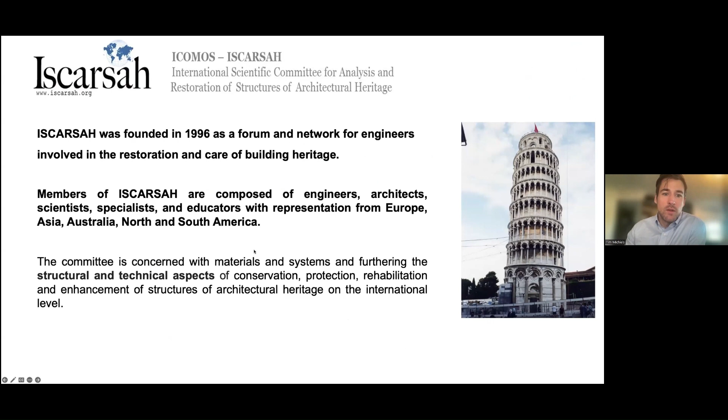Today's webinar is brought to you by ISCARSAH, the International Scientific Committee on the Analysis and Restoration of Structures of Architectural Heritage. While more people join, I will briefly introduce our scientific committee. We are an international group of engineers, architects, scientists, and educators dedicated to the restoration and care of built heritage. We mostly focus on the structural and technical aspects of conservation of architectural heritage.

We have a diverse board with, at the helm, our president, Paulo Lourenço, and our secretary general, Tom Morrison. The goals of ISCARSAH are, amongst others, to disseminate knowledge, promote international cooperation, and organize international training programs. Another goal is to collaborate with other scientific committees, and we are happy to welcome speakers and members from a wide variety of ICOMOS committees today.

In the past, ISCARSAH has published principles for the analysis, conservation, and structural restoration of architectural heritage, and we are currently finalizing the monumental task of creating updated guidelines for the analysis and restoration of heritage structures. We publish newsletters and a bulletin and organize two webinars each year, all of which can be found on our website and YouTube channel. We also organize workshops.

The last ones were in Iran, Korea, and Japan. The next workshop and general meeting will be held in Romania in September. Thank you, Radu Kazimir, and all of ISCARSAH Romania for organizing. You can still sign up and join us in Romania in September.

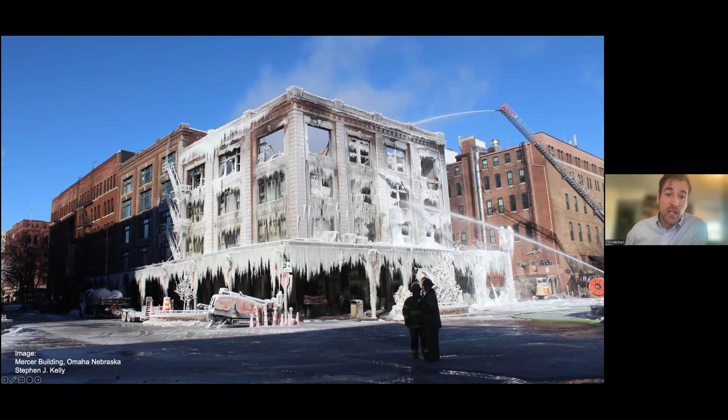The recent traumatic burnings of the Brazilian National Museum, Shuri Castle in Japan, or today's blaze in Copenhagen illustrate that. As heritage professionals, dealing with fire is not a new task. Adaptation to fire has shaped our building practices for centuries, as structures have been burning and rising from ashes for ages. As caretakers of historic buildings, we are not only tasked with the aftermath and restoration or reconstruction, but also have a duty to protect and plan ahead for the next fire.

At ISCARSAH, we believe that knowledge transfer and education is one of the key elements to help mitigate fire risk. Therefore, we have assembled four experts today that have dedicated their careers in part or in whole to assessing and mitigating fire risk. We bring to you perspectives from New York, Iran, Switzerland, and London on fire risk in Mongolia, Isfahan, Bhutan, and France. On behalf of myself and my co-organizers and the entire ISCARSAH community, I would like to thank these speakers for their dedication and for sharing their experience.

Our first speaker today is José Torero Cortés. He is professor of civil engineering and head of the Department of Civil, Environmental, and Geomatic Engineering at University College London. He works in the field of fire safety, where he specializes in complex processes and environments. Prof. Torero Cortés has participated in numerous fundamental research studies that range from how fire affects historic buildings to modern architectures and even spacecrafts. He has developed novel technologies that use smoldering combustion for the purpose of resource recovery that are being used globally, and he has received multiple awards. He's a chartered engineer in the UK, a fellow of the Royal Academy of Engineering, the Royal Society of Edinburgh, the Australian Academy of Technology and Engineering, the Society of Fire Protection Engineers in the US, the Institution of Fire Engineers in the UK, the Institution of Civil Engineers in the UK, and of the Combustion Institute. Prof. Torero Cortés will speak about the fire at Notre Dame Cathedral.

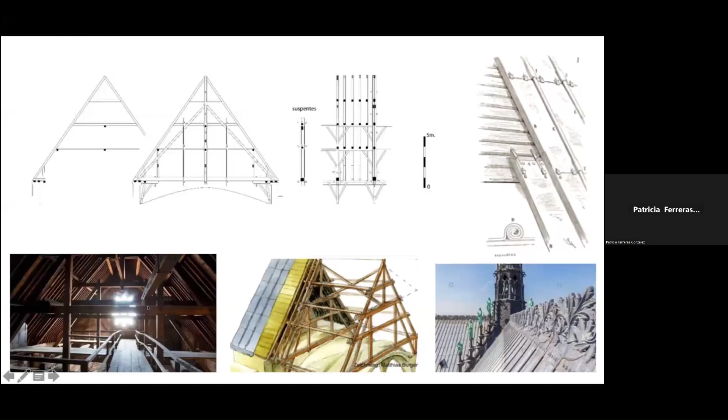On the bottom left is a photograph of what is nicknamed 'the forest' - basically the structure of the roof.

This type of timber structure has the potential of burning quite easily. It's very dry timber with very small elements, all aligned very close to each other, so there's a very significant amount of radiative heat transfer. So the hazard is a very significant and recognized hazard - something we know actually exists, and that we should be protecting for.

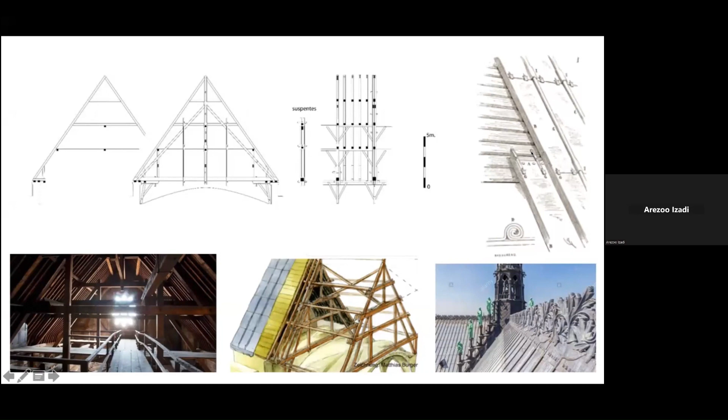For that purpose, you can see in the two right images the lead shingles or lead cover used as protection that had been taken out for repair. This is, I guess, the key question. We have a very well-known and extraordinary hazard, and a mechanism of protection for it, and that mechanism of protection has been taken out - rightfully, for the purpose of developing repair works.

So now the question really is, what kind of precautions should be taken? What is the kind of training and competence of the contractors working on this, and how do we guarantee that an event of this nature should never happen? Because in principle, that is the key question to be addressed - this event should have never happened. So why did it happen in the first place?

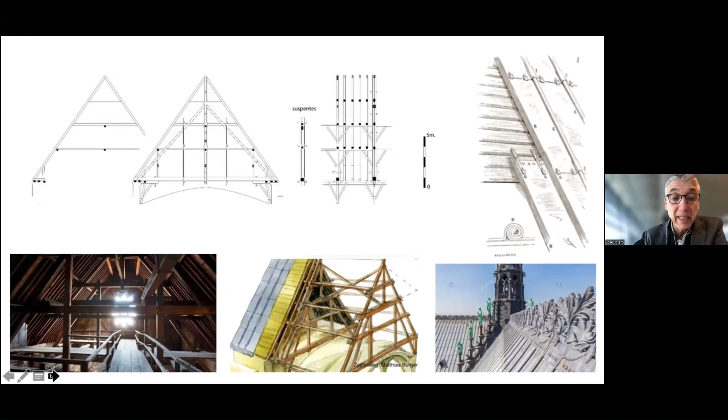This is a bit of a problem because, in essence, before you call the fire service, you need to bring somebody up to verify there is a fire. Only then do you call the fire brigade and start the process of addressing the event.

The fire was detected at 6:18, but it was not confirmed until about half an hour later. So the first engine does not arrive until 7:25, to start with the appropriate external attack. The firefighters arrived about 30 minutes into the event. In the timescale of a fire, a 30-minute delay is an extraordinary delay - an absolute lifetime. So a protocol that resulted in a delay of more than 30 minutes, almost bringing the appropriate appliances an hour later into the fire, is something completely unacceptable.

Furthermore, there are issues with the incapability of the systems to provide water to the roof. The water was reaching only the walls of the building. Furthermore, there was a standpipe that was not functional, for which the fire service had to improvise and extinguish the fire in the North Belfry, carrying spools of hoses up a terrace and draping them over the facade to receive water supply. So in essence, this is not one intervention in which things are working the way they are supposed to work.

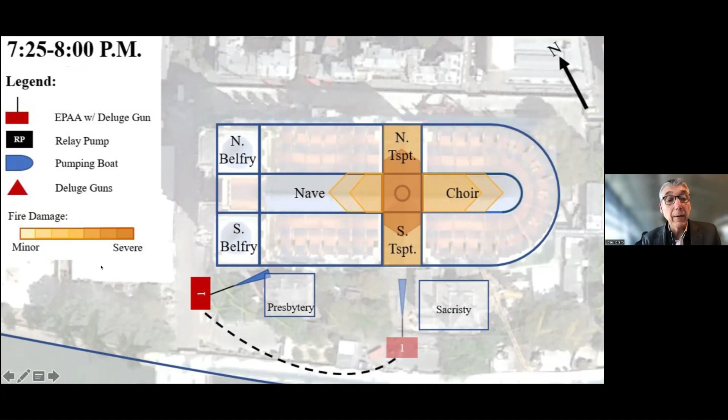Eventually the steeple will collapse, perforating the vaults and landing an enormous amount of burning debris into the interior of the church. At this point in time, about half an hour later, the fire has already spread all over the roof.

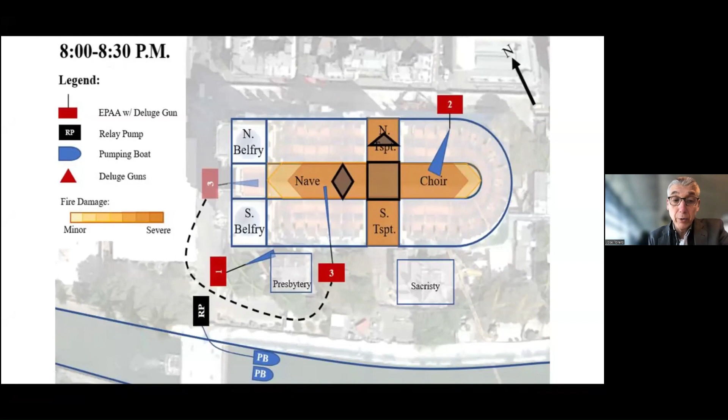It's only at this point where the firefighters can actually reach elements of the fire with water, using pump number 2. Pump number 3 is being moved away towards the north belfry to try to fight the fire there, and that pump, which was trying to stop the fire in the roof, considered the fire was already gone and started taking control of the north belfry, which technically speaking was a very good decision by the firefighters to try to stop that fire.

But nevertheless, at that point in time, there is basically no roof left. The steeple had collapsed at about 7:50, and the roof was already gone at that point.

One aspect that was advertised very strongly by the media was the use of Colossus, an automated robot that went into the church and tried to fight the fire. You can see from the image that the jet is being pointed towards a fire that is above, and the water is really not getting to the fire. It was somehow effective in fighting the fire at the ground of the cathedral, but that was a secondary fire because given the volume of the cathedral, that amount of fuel would not have been that significant.

So in essence, while this was very heavily promoted as being an extraordinary success, the limited success of the use of this robot is something we actually have to consider when we think of firefighting tactics for a building of this nature.

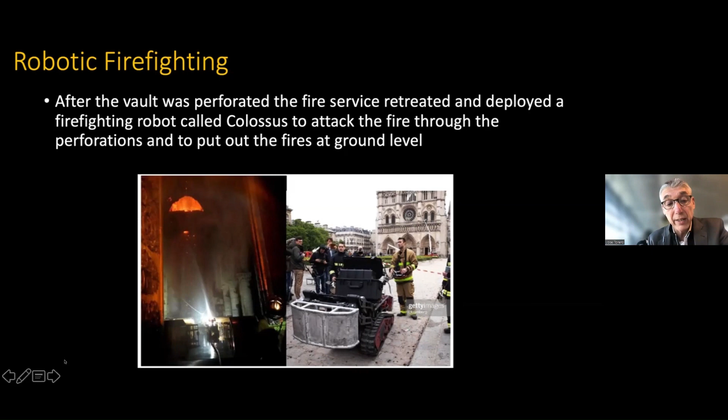So as you can see, this is not a prime example of extraordinary performance in response and preparedness. I think we need to really think very carefully and ask ourselves whether in an event of this nature, it is acceptable to be so unprepared in dealing with absolutely invaluable patrimony. Notre Dame is one of the symbols of France and of humanity. Its value is immeasurable, and the risks and hazards were very well known. It is difficult to understand how a sequence of events of this nature can happen, from the onset of the fire all the way to the response and intervention, that allowed a situation to build up to a point where we lost complete control, and the fire basically destroyed a very significant part of the patrimony. Thank you very much, that's pretty much all I have to say. I'll mute myself and pass back to the moderator.

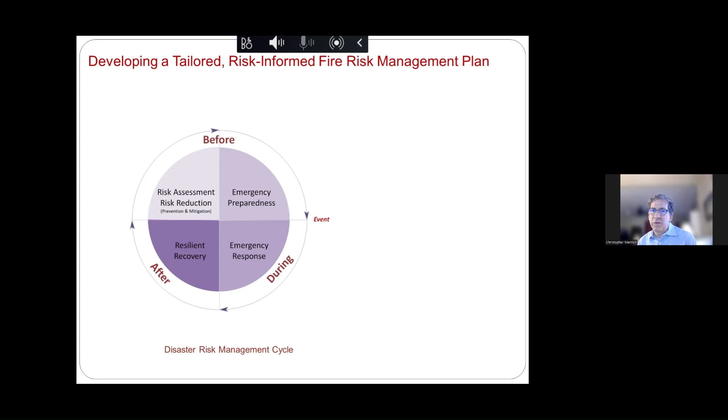In terms of developing a risk-informed management plan to help reduce the potential for fires, just looking at the overall disaster risk management cycle, which some of you have probably seen, we try to address prevention—limiting fire from happening—and then obviously planning should something happen, the emergency response part, and then having plans in place for resilient recovery. What I wanted to focus on more this morning was just the before portion, in terms of developing a risk assessment and risk reduction measures, and also getting into some emergency preparedness.

In terms of the process, first starting out is understanding our goals and objectives and what it is that we're trying to do, and should there be a fire, what are the limitations, hopefully in terms of amount of damage.

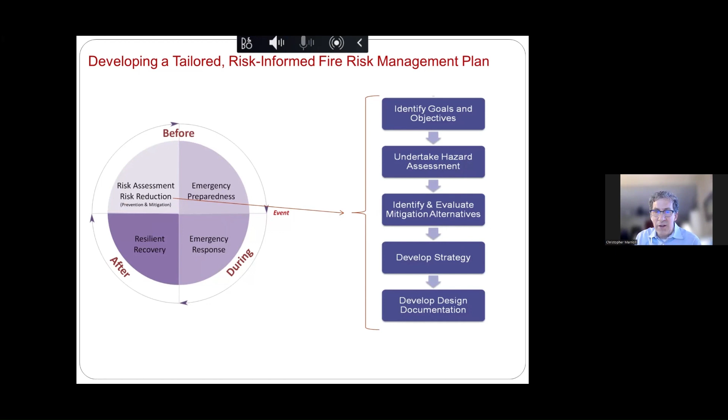Once we understand what we're trying to do, the next is doing a hazard and risk assessment to understand from a fire side what some of those may be and where our vulnerabilities may be. From there, we then look at what can we do and put in place in terms of prevention and mitigation measures, and then developing and implementing an overall strategy in order to accomplish our objectives.

Looking at objectives, a few different things being cognizant of was obviously the safety of occupants and the emergency response team. We're also looking at protecting the historic structure, as well as the collections and content. We want to maintain the intended functionality, and in part what that means is the burning of candles and butter lamps. So we're not looking to say you can't do that, but it's acknowledging that's part of the functionality of the monastery. How do we do that safely?

And then developing an overall risk-informed fire risk management plan that accomplishes a few things, including incorporating the inherent features where we can, embracing local indigenous traditions, knowledge, materials, and resources, minimizing the impact when we do that in terms of limiting impacts on historic fabric, and that the solutions are integrated and work together.

The other thing is obviously being aware of resources, particularly financial resources, and having measures that are cost effective and low cost, high impact. Also that these aren't just day one working, but thinking going forward about some of the different issues, making sure that these are really sustainable in terms of a long-term effective perspective.

In terms of ignition sources, just a quick overview, some of the main ignition sources are the burning of candles and these butter lamps, which are kind of chalice-shaped cups, where they put actual butter in and then burn cotton wicks. They leave these in the monasteries until they end up burning out.

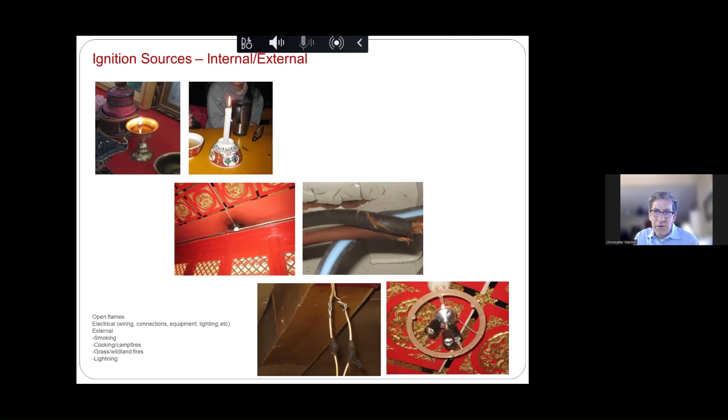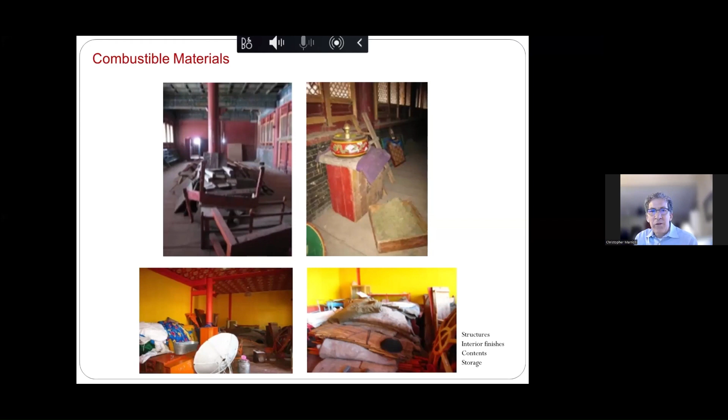A fair amount of combustible materials has accumulated over the years that were noted, as you can see here. Some of this debris could probably be removed, and others they may want to obviously keep.

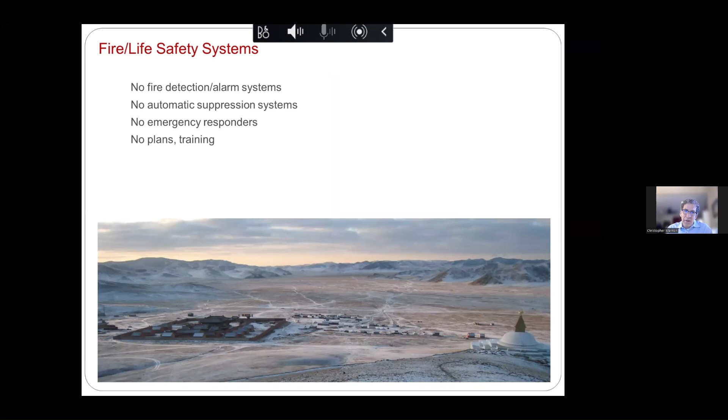In terms of overall mitigation systems, there was nothing at the time in terms of fire detection and alarm systems, or automatic suppression systems. You can see here how remote this is, with no emergency responders and no emergency response teams on site. Nothing at the time had really been done in terms of any planning, training, or running of drills.

So kind of encapsulating that, what does that mean? In summary, we have a lot of potential ignition sources, which means there's a higher probability of there being ignition. We have a lot of combustible materials, which can lead to fast growth, large and long duration fires. Without having any automatic detection or alarm system, there are delays in responding and notifying people to be able to try to put the fire out while it's small and manageable. There's no automatic suppression system, so the fire will continue to grow if it's not fought in manual suppression.

With the limited awareness and training, it will be very difficult in terms of response and trying to do any kind of manual firefighting. And these 28 temples within the overall monastery are fairly close, so there's a chance for fire to spread.

So what do we do? Looking at two things. One is, can we reduce the probability of ignition even happening? And the second part is, what can we do to try to limit the overall magnitude, size, and growth of the fire?

In terms of reducing ignition sources, again, we don't want to be saying you can't have butter lamps and candles and so forth, but what can we do to make this a little less susceptible to fire? One part is just looking at some of these butter lamps, and can we help stabilize these so that they're not able to tip over as readily?

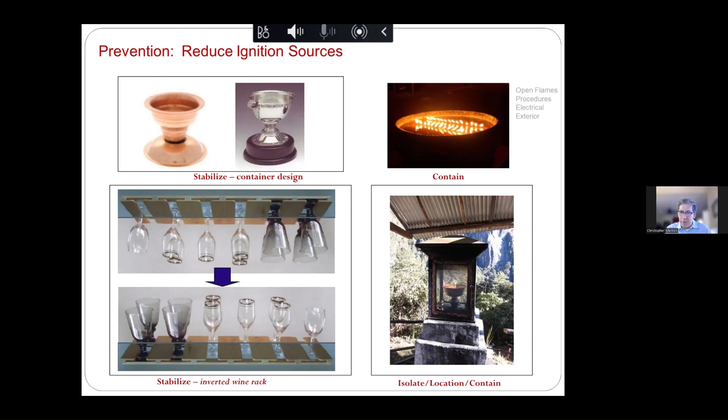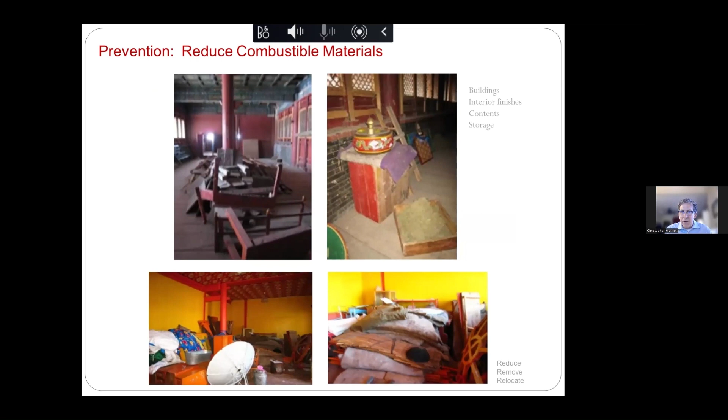In terms of combustible materials, again, prevention - if we can at least separate ignition sources from combustible material, but also reduce the quantities, whether we can get rid of that, whether we can move some of these out of the main temple, which is really the most susceptible and the one they're trying to protect the most, but even relocate these in some of the smaller temples adjacent to this if they need to keep them. Whatever can be done to try to reduce combustible materials will definitely help.

In terms of mitigation strategy, broadly, globally, we're looking at detecting a fire. Once it has started, we need to notify occupants and emergency responders. They then need to respond, and then suppression activities can begin.

As you can imagine, though, we're not able to really do that in this particular location due to a number of things, from where it's located, and especially resources and financial resources in terms of trying to parallel what may be done elsewhere in the world. We're looking at having more of a manual detection, notification, response by people there on site.

So what this may look like a little bit closer was looking at having the butter lamps in the main temple area, which is where people really wanted to be, and not have those in the surrounding other 27 temples. And then having some of the younger monks - there's probably about 40 of them, at the ages of probably 5 to 15, that are there studying and practicing - maybe do an hour or two of fire watch throughout the main temple area.

In terms of notification, we looked at using the bell - the main monastery bell had fallen - so looking at using the conch shell instead, since they were using these to wake people up in the morning and call them into prayer. So they were very cognizant and tuned into that.

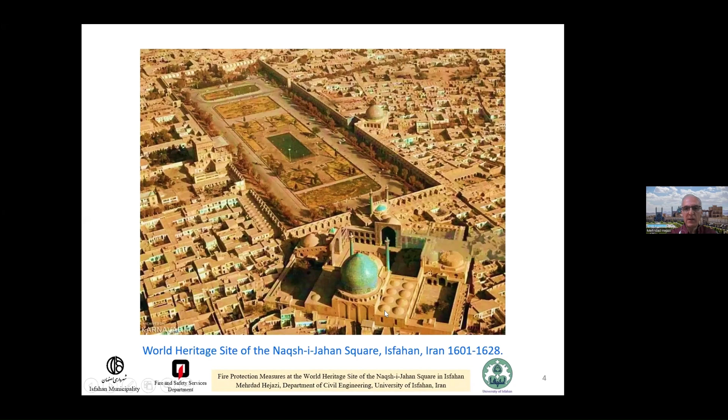The site is quite huge, more than 500 by 100, and there are 4 bazaars around and three main buildings of Isfahan. It is a World Heritage Site, built about 4 centuries ago. These are the main 6 parts of the site.

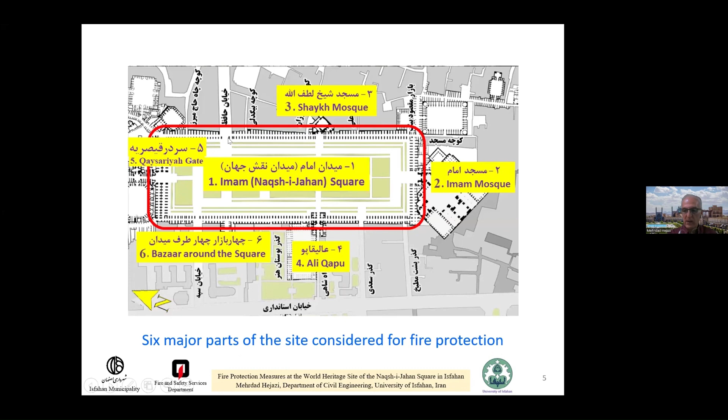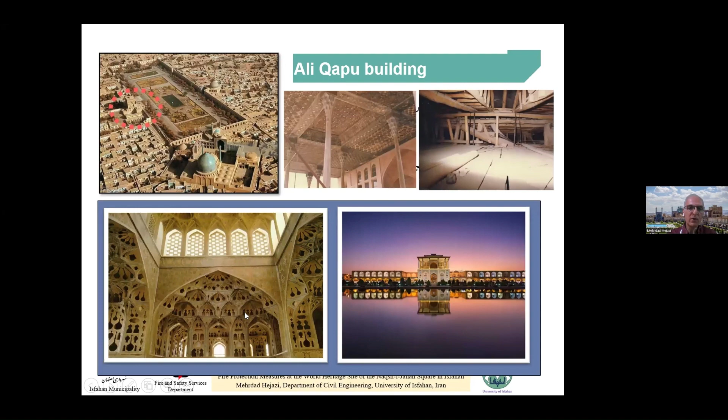As you see here, this is the main mosque, and inside here you see the second mosque. Here you see a palace, and the palace has a wooden part similar to what Chris showed us, and also inside there are some precious paintings and so on. It is also the entrance of the main bazaar, which is itself a precious piece of art. Around, as you see here, there are some shops, and here you have ignition sources that we had to tackle.

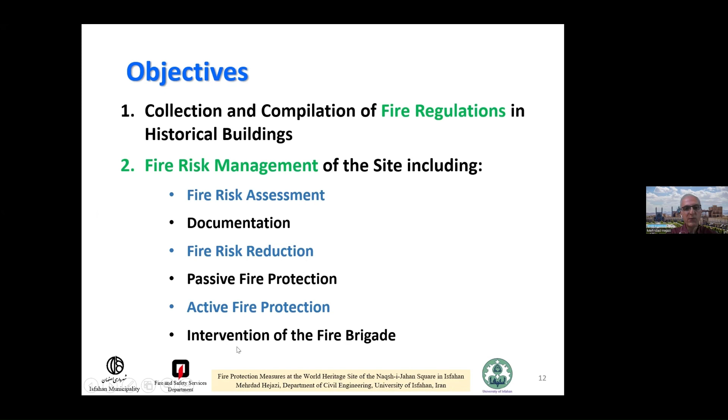The objective was first to collect and compile fire regulations for historical buildings, which are mostly made of masonry and in some parts wood. Then we planned the fire risk management of the site, which included fire risk assessment, documentation, fire risk reduction, a plan for passive fire protection, a plan for active fire protection, and a plan for intervention of the fire brigade.

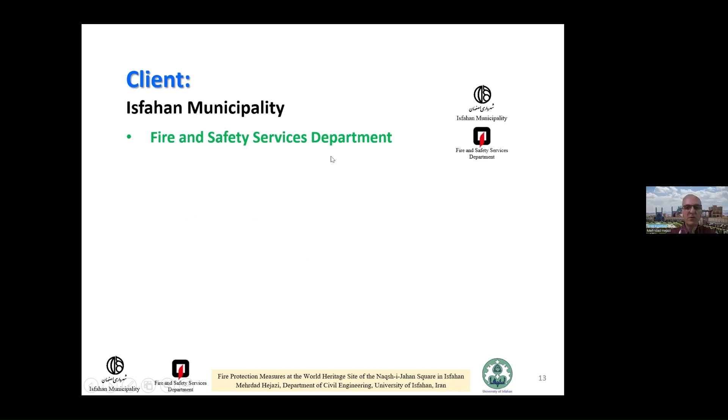UNESCO had asked the Iranian Ministry of Cultural Heritage to make a disaster risk management plan for the site, and one part was fire. Isfahan Municipality and the Isfahan Fire Safety Services Department were in charge of that, and we at the University of Isfahan did the project. The main user is the Cultural Heritage Organization, and also the people who live or work there. The project was carried out over more than a year, from 2020 to 2021.

The first part of the project was to collect and compile some fire regulations. As you know, there are so many regulations all around the world. Even in Iran we have a regulation for that, but we had to choose regulations that comply with the situation we had, and we were able to do that.

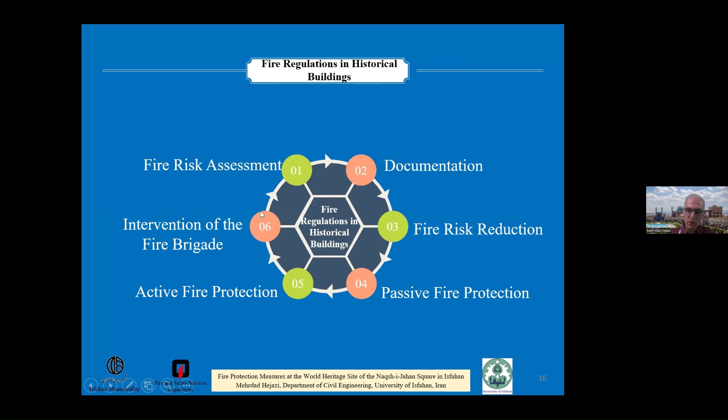We made a good search on fire risk assessment methods, documentation, fire risk reduction, and so on, which were suitable to the site. Then we went to the fire risk management of the site, and the first part was understanding and identifying the site based on fire risk.

In order to do that, we had to design checklists which were usable or suitable for the site. Then we had to do space coding because it was a very large site. Then we had to see the current status of fire alarm and extinguishing systems in the site.

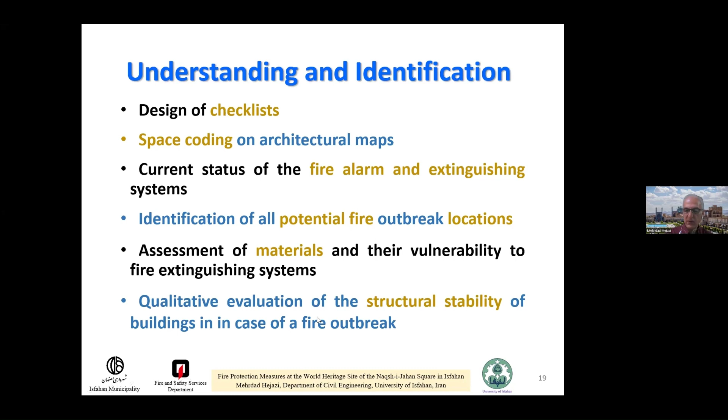We identified all potential fire outbreak locations and ignition sources, and also assessed the materials and their vulnerability, relevant to the fire extinguishing systems that we were going to use later. At the same time, we did a qualitative evaluation of structural stability, in case something happens, so we were sure what would happen.

This is a sample of the checklist. It is in Farsi language, but if I explain: this checklist is just for one space, I would say for one shop, for example.

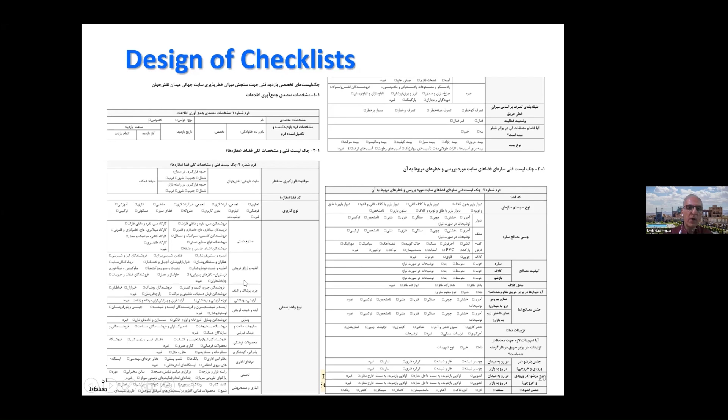This explains the material type, the type of structure, the openings, the material of the windows, and the type of shop and what is sold there. We also had to do space coding for the whole area, checking and getting information from every specific part.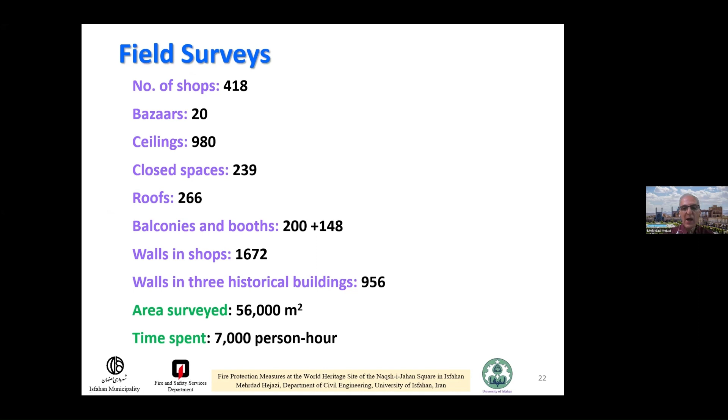The number of shops surveyed was over 400. The bazaars around were 20 parts. The ceilings numbered around 1,000, closed spaces more than 200, roofs more than 200, balconies on the second floor over 300, and walls in shops were 1,600, with walls in the three historical buildings around 1,000. The area surveyed was more than 55,000 square meters, and we spent over 7,000 person-hours there.

First, we went to fire risk assessment. To do that, we had to choose a usable method. We chose the ABC method suggested by ICCROM for museums, but we developed it further to be applicable to the site and the buildings. At the end, we were able to sort the magnitude of risk.

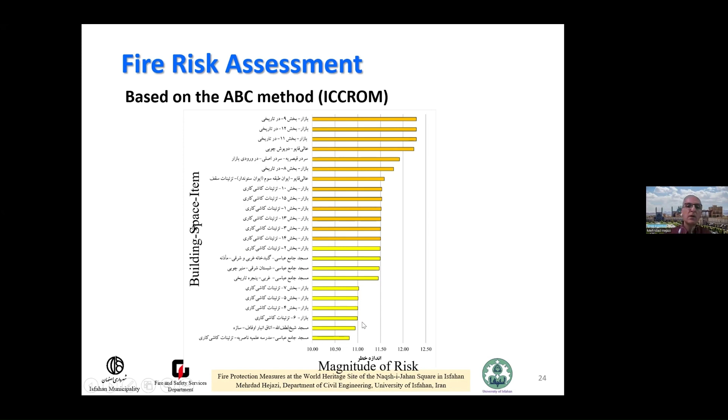Here you can see the building, the space, and the item. There may have been more than 2,000 or 3,000 of these items, and we were able to evaluate the magnitude of risk and give priority to them to tackle.

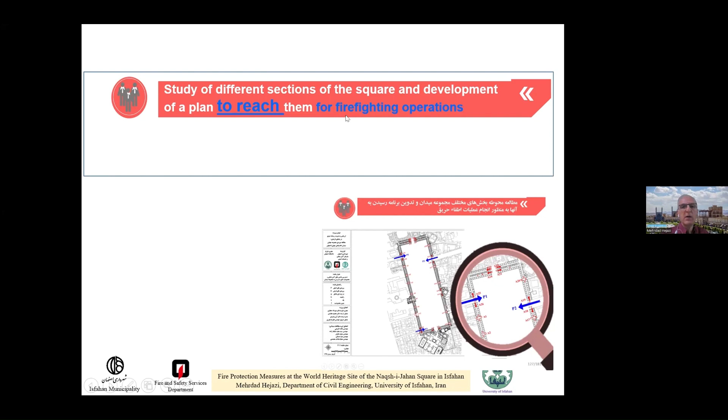Then we had to develop the intervention plan. I'll explain some parts we did. First, we had to study and suggest a plan to reach the different parts of the site by fire fighters.

We suggested water reserve sources in different parts, because in case something happens, we need water. So we suggested in which parts they should be located.

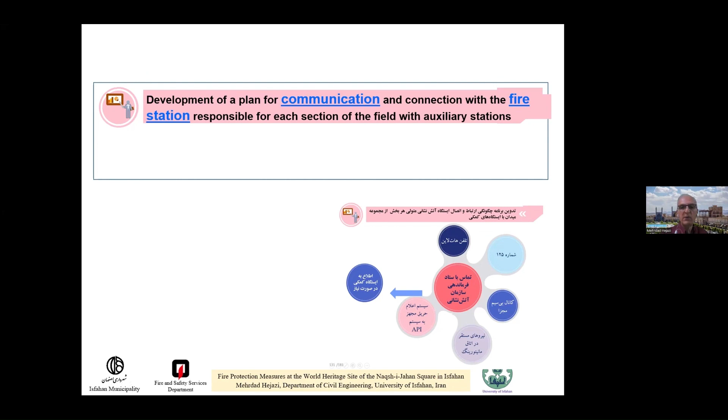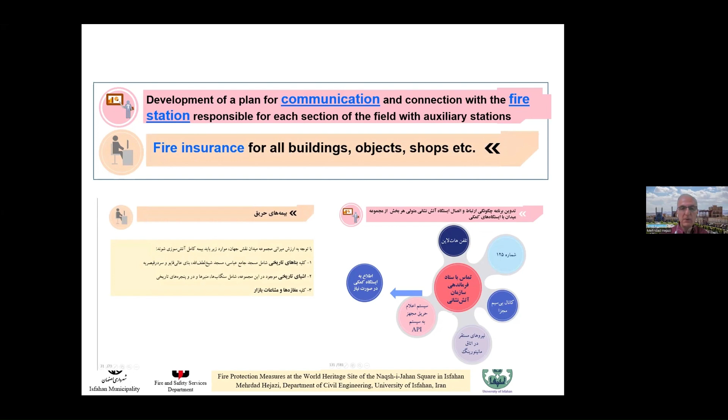The communication system with the fire station around was not so good, so we did some design for that. Also, most of the shops or even the buildings were not insured, so we planned for them to get fire insurance in case of any incident.

Then we went to compartmentation of different parts in order to prevent fire from progressing, so if something happens we can contain it.

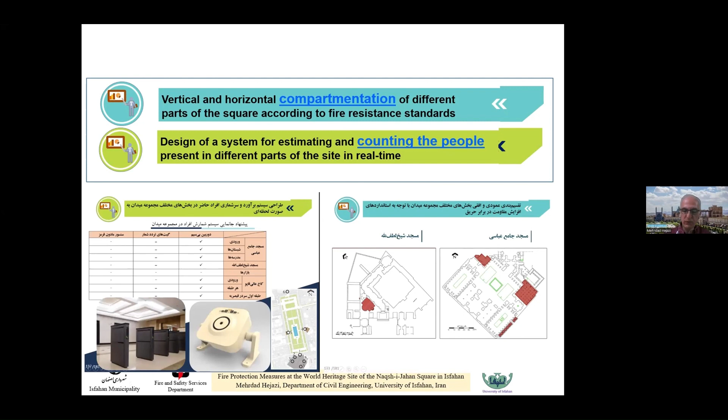It has two sides: one is the historical buildings. Inside, we had to have a counting system to know in real time how many people are there, in order to be able to evacuate both the buildings and the bazaar.

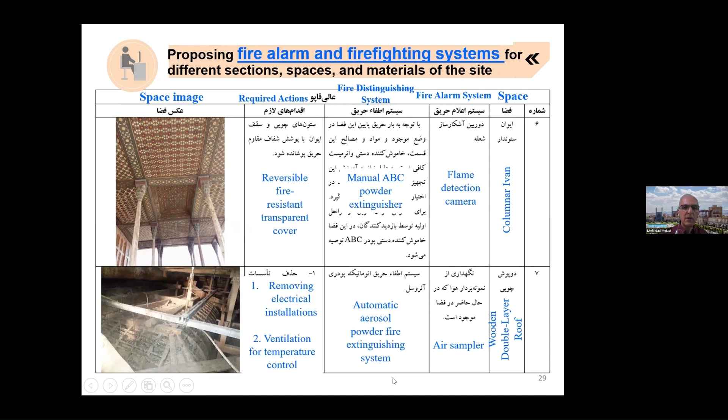For each specific space, we suggested a fire alarm system — for example, flame detection cameras, fire extinguishing systems, and other actions that should be taken. For every single one, we worked with the help of experts.

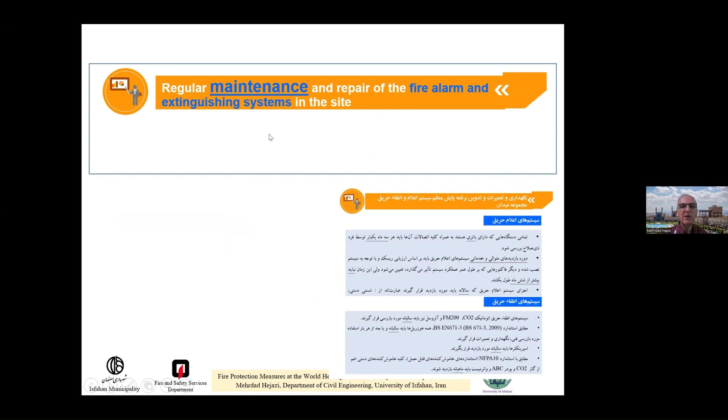For the maintenance of the system to be installed later, we did some planning, and also for an alternative communication system in case of power and telephone outage, we made plans.

Because there are items like wooden doors and drawings, we made catalogs for each and set priorities, so if something happens, the fire brigade would know where the item is located and what to do.

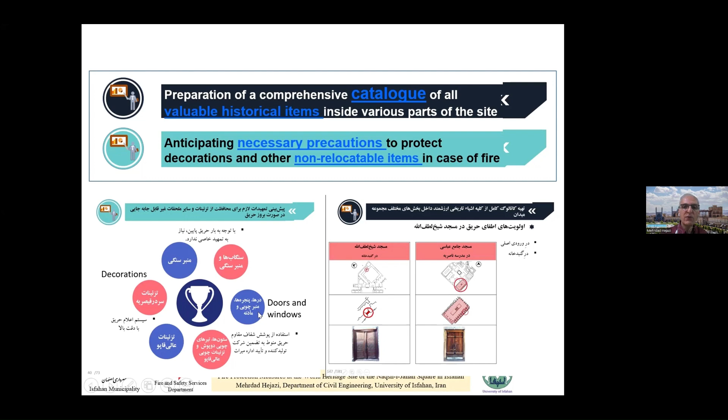To mitigate and prevent risk, we suggested precautions to protect items during a fire, and for action during an incident, we planned for quickly alerting the fire station.

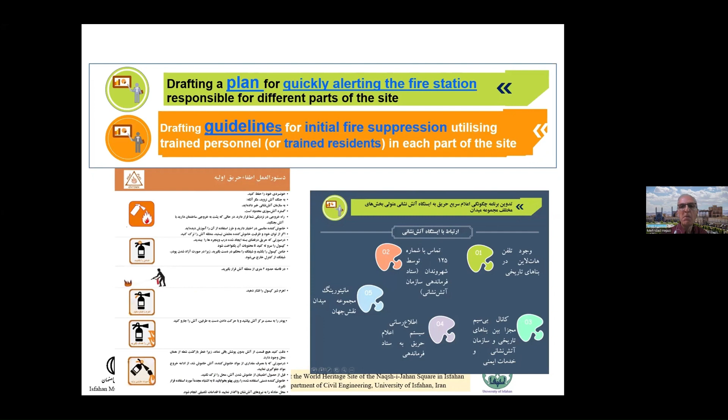We prepared guidelines to be installed in every part, including guidelines for the evacuation of visitors, to be installed throughout the site.

We also planned for emergency response in different parts so everybody knew their duty, and for each building we prepared a booklet called the Fire Extinguishing Plan and Guideline.

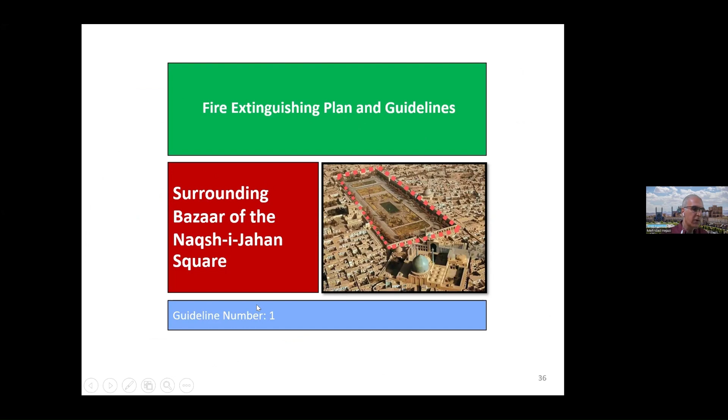For example, for the bazaar, it included the fire extinguishing plan and guidelines, and we prepared a site plan for each part.

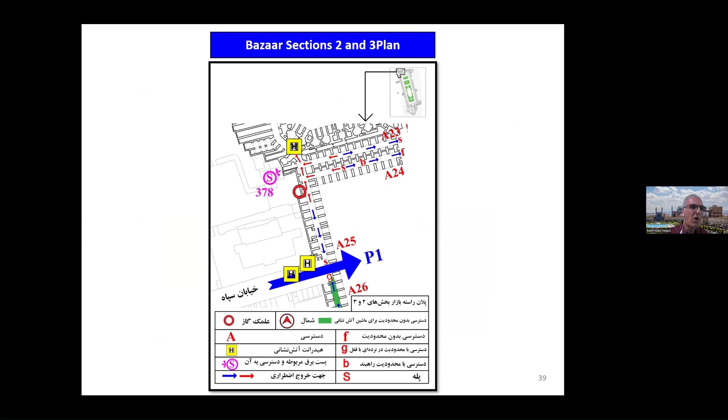We prepared plans for evacuation routes and evacuation procedures for visitors, as well as for the security personnel responsible for fire response.

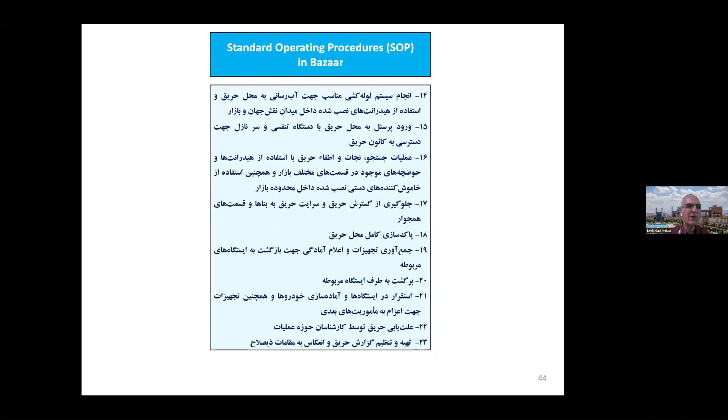Thank you very much, and I hope you have enjoyed this presentation.

Now we can go on with the last speaker, Andreas Galmarini, a structural engineer with a background in bridges and reinforced concrete structures, whose portfolio contains projects all around the world. He is a member of the Swiss Humanitarian Aid Unit focusing on structural assessment after earthquakes, and since 2016 he has been a board member of WaltGalmarini, a structural design office in Zurich working on hybrid and mixed material bearing structures. Today he will speak about the reconstruction of one of the most important heritage buildings in Bhutan, which fell victim to a fire.

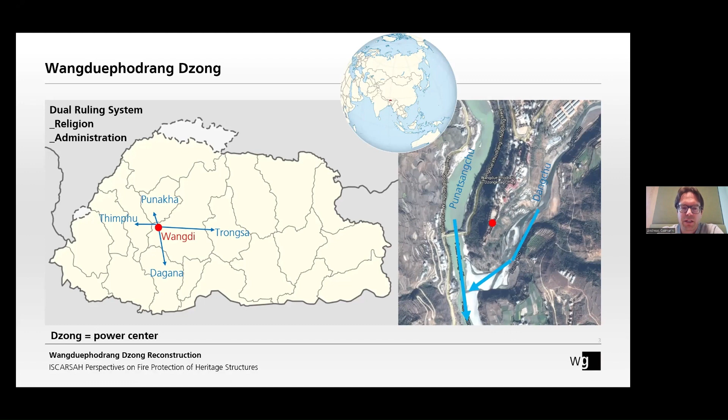In Bhutan, they have the speciality that in every region they have the administration and the religion gathered in power centers, and these are the dzongs.

Our dzong that we are looking at has over time not changed a lot. In the 60s, you see on the right side, the image, it's really on the hill, accessible especially from the back of the image. It was built in the 17th century by the state founder.

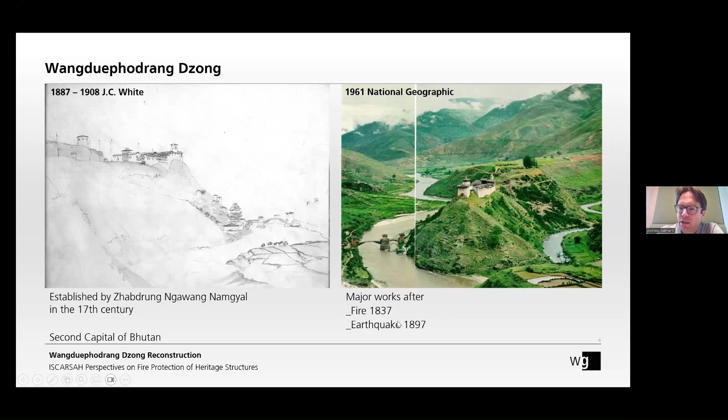It was the second capital of Bhutan. And we know that there were major works after the fire in 1837 and about 60 years later after an earthquake.

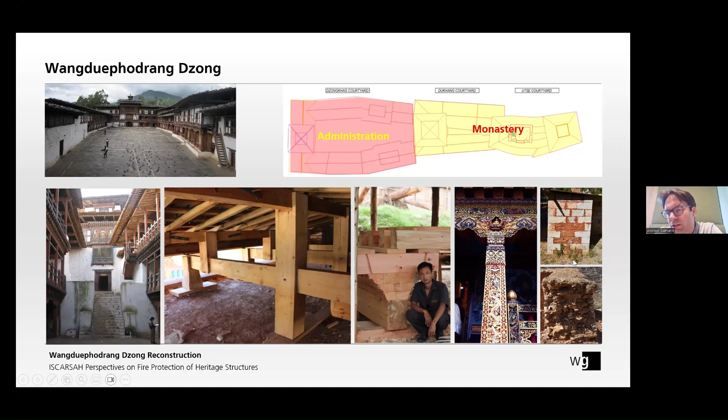If we speak about the structure, then we also have to speak about what materials are used. It is a lot of stone. There is also some rammed earth traditionally. Then there is a lot of timber, used for the roofing and the flooring. There are mostly built up members that are intricately painted and carved. On the right side you see the masonry; between old and younger, you see a lot of variations.

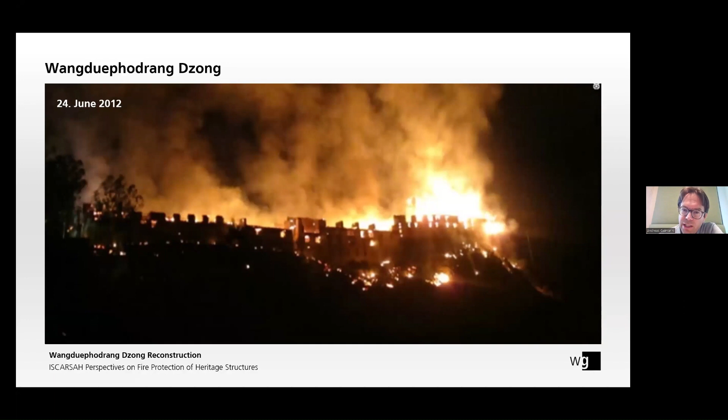Actually, the source of the fire, an electric short circuit, happened in a very bad location, supposedly just beside the entrance. Unfortunately, the first thing that happened is that the entrance tower collapsed and people could not enter, and state television showed the entire night how the national monument, which is also on the tentative list for World Cultural Heritage, burned down.

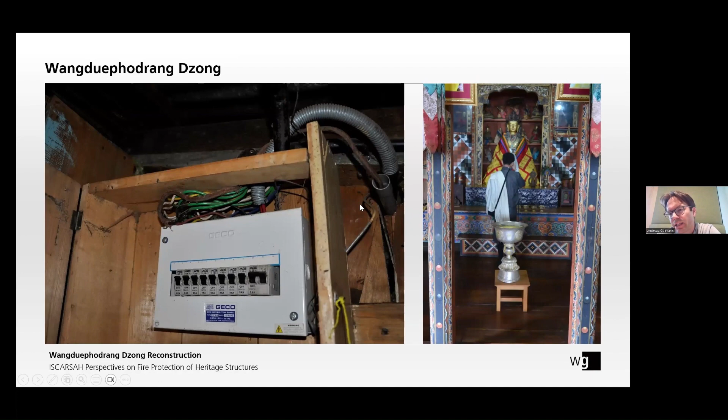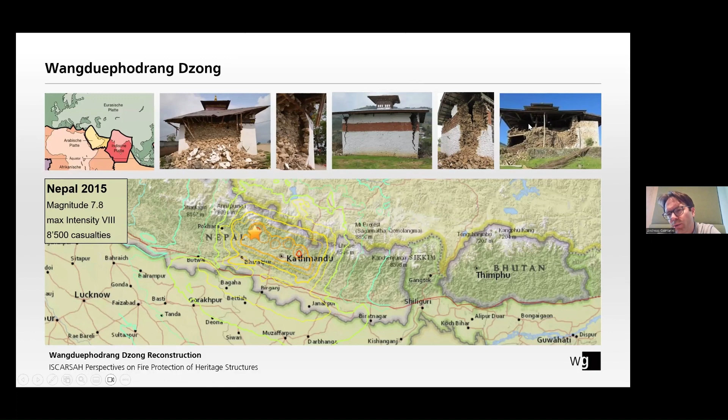The sources are very similar as discussed for Mongolia, the electric installation and the butter lamps. Another source for endangering those structures is the earthquake, and there have been recent earthquakes giving always the same type of damage.

With this structure burned to the ground, the question to the local people, local administration, was what to do. Shall we do something modern with modern standards? Do we rather want something very traditional? If we want it traditional, shall it be very conservative minded, making exactly the same again, or as the clergy would like, a very splendid traditional design?

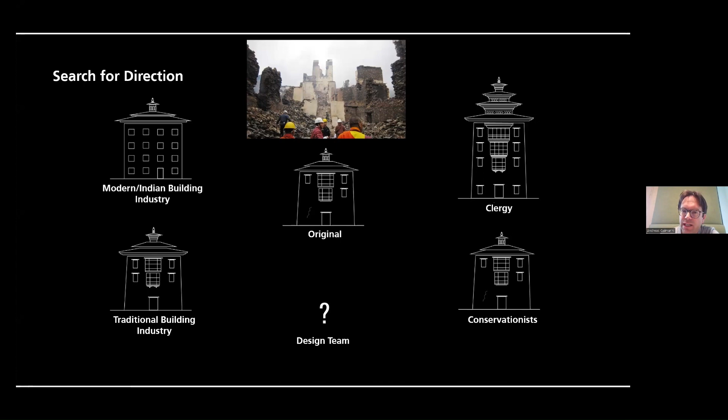To solve such questions, the Bhutanese have a very standard system. They call in international experts and make a workshop, which happened here in this case in 2015, with some participants of this colloquium also participating. We then got the job to help the locals implement what we found out.

The main goal actually was the earthquake proofing. And here we saw these delaminating walls. We mitigated that by inventing a through-stone element, trying to stick together the left and the right side of the wall.

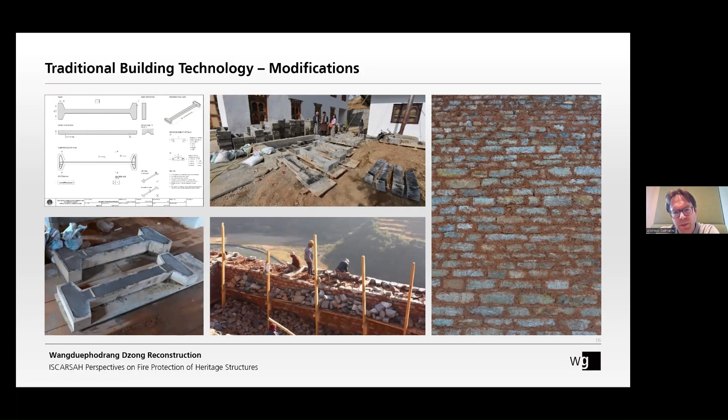As you can see, we did a little prefabrication yard and then an implementation. This is the sample wall to assure that it was not giving a negative impact on the heritage value of those walls that had to be rebuilt completely because the stones were cracked due to the fire.

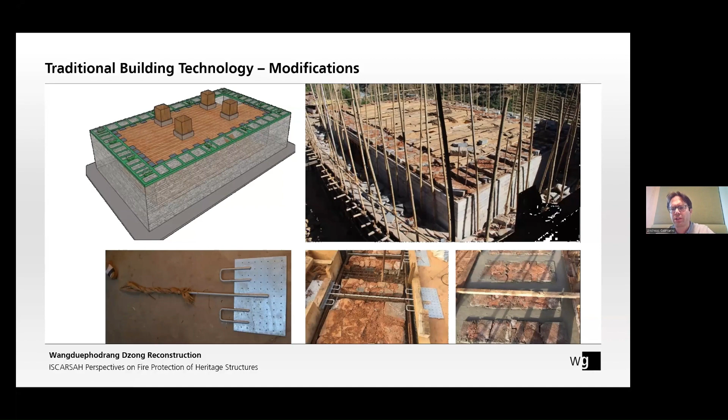We then tied together the entire buildings by a ladder beam connecting to the flooring. You see again the system laid out. It's of course resembling the through stones, just interconnected in a very soft way in order not to disturb the properties of the stone masonry with mud mortar walls.

Then the flooring, we had to make more stiff in plane. So instead of having one layer of timber planks, we introduced 2 layers which were nailed together at 45 degrees. With that, we could earthquake-enhance 90% of the structure, but there was still the highest tower that in the original had a very high basement, which was basically only structure and a stair, and it should host more temples and be higher for the clergy.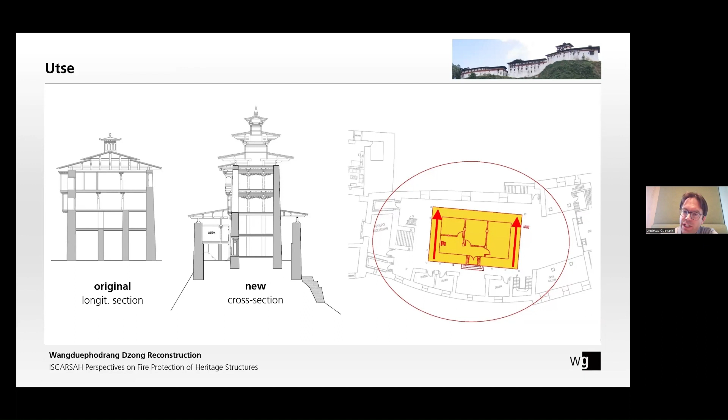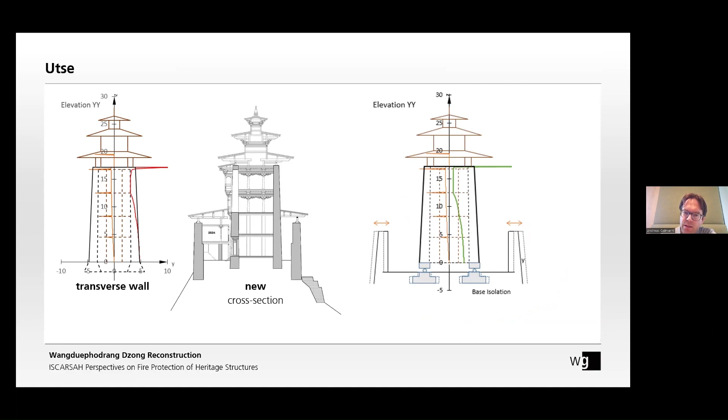It was very narrow on one side. The hill is very steep, so there was no chance we could increase the width of that structure. So what we did is we implemented a base isolation with walls up to 1.8 meters thick. The weight is a real issue, so we had to combine not only elastomeric bearings, but also use sliding bearings to cope with the weight.

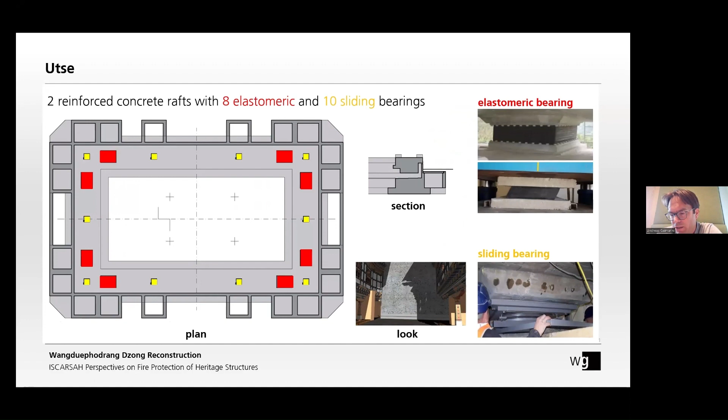A big issue was the look of such a modern intervention in a traditional building. It was decided, though, that it could be implemented, and with that we had the basic design solution to the original. So this was the design. We were working there over half a year to get the basic design ready.

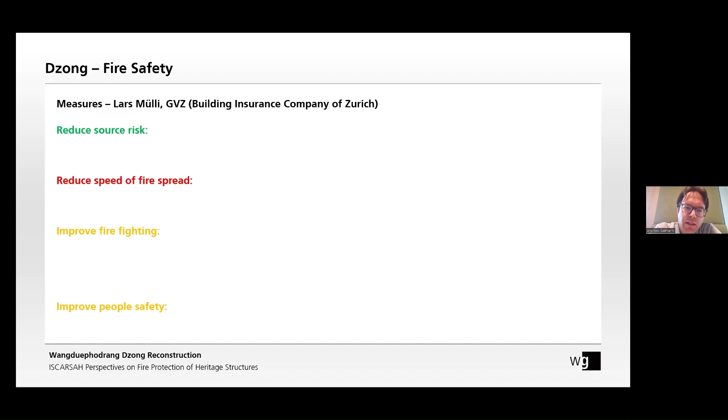Within that time, we also said, well, it's a little bit funny to look only at earthquake proofing. Why shouldn't we also try to implement at least some measures to address fire safety? We got some help from a friend of mine from the building insurance company of Zurich. We tried to address reducing the source risk, reducing the speed of spread, and improving firefighting and people's safety.

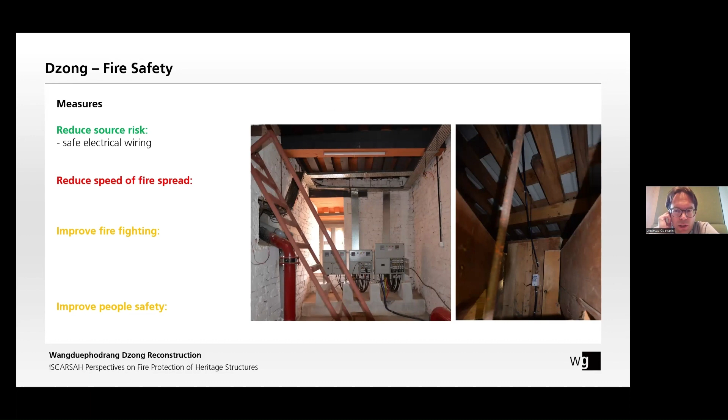What did we do? One is, of course, trying to improve the electrical wiring. You see in the middle a picture that is significantly better than what had been there before. But on the right side, we also see that when you start on a very low level, you can only reach so far, and there will always be some glitches.

Similar to the open butter lamp discussion we had in Mongolia, it is very much the same here. The measures are the same, and the conclusion that you cannot prevent them from occurring is also the same.

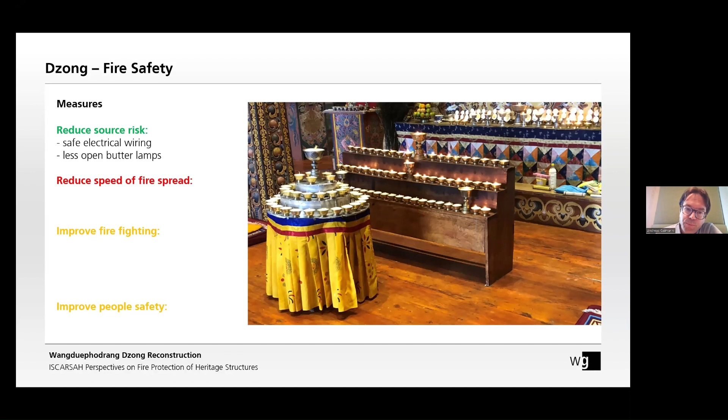Having fire cuts here, we also, in a way, failed. One of the very classical items of Bhutanese architecture is the flying roofs, and they were overlapping, and still are. We tried many different ways, but the locals said they cannot change from having these flying roofs, so we guess they will still be one of the major drivers of the spread of fire.

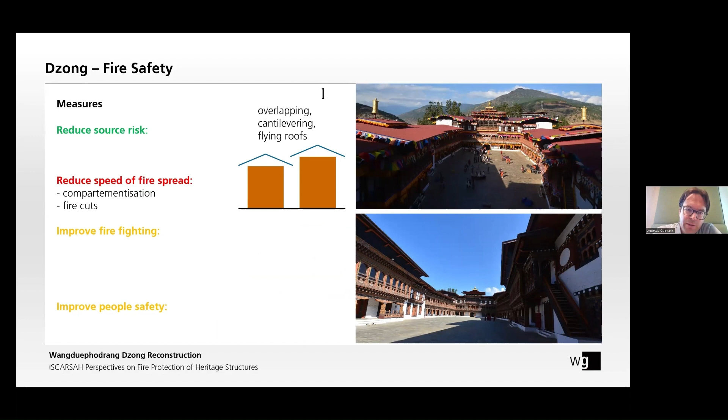There were no hydrants before. We did improve by introducing hydrants both inside and outside in the different courtyards. As you can see, the courtyards can be very narrow, so it is a question not only of having fire hydrants, but also how to get to the area of the fire.

We suggested not training only external people for firefighting, but rather using the monks that live here and are here permanently. They can spare some time and train for firefighting.

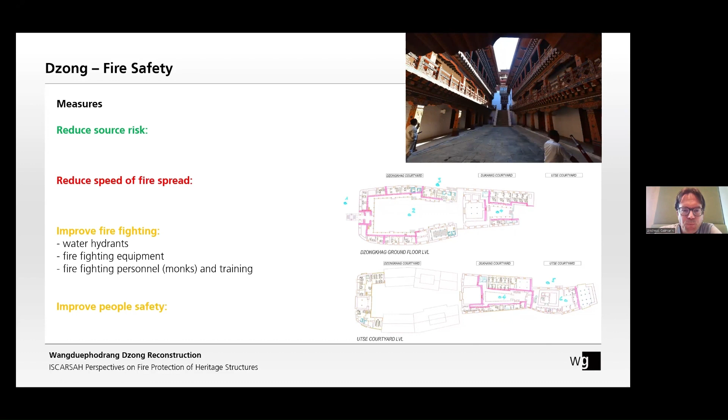Then, of course, reduce the time or the equipment needed. We introduced a tunnel below the whole historic structure, collecting all the piping, which is good not only for firefighting, but also for the structure itself, because having water seepage in the tunnel rather than in the mud walls is an advantage. You see some images of various equipment for firefighting dispersed throughout the structure, and some alarm devices which should help reduce the response time for firefighting.

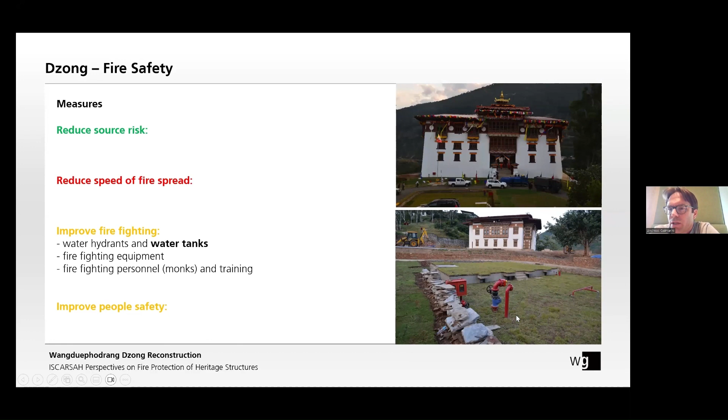Of course, water hydrants are only useful if you have water, and in this place this was not even easy. We had to collect it quite far away and build tanks of various sizes and shapes in order to have a reasonable amount of water once it should be needed.

Safe access for firefighters is important, as we saw with the cause of the fire. But evacuation is also an issue, and we introduced at least one or two safe exits in every courtyard. Note that this first big courtyard is used for festivals every year and is very crowded during that time. We also introduced a pathway around the structure so that people could not only go and tumble down the steep slope, but really walk around it. In the picture below, the dashed line is the tunnel.

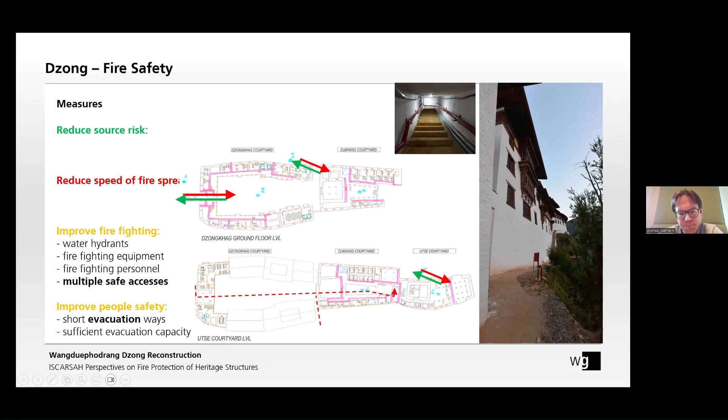We started in 2015. End of 2022, the structure was inaugurated. I think the conclusion we took is if you have an old structure and you need to reconstruct it because it was damaged by either fire or earthquake, you can have basically three approaches.

One is to use the traditional techniques and the traditional structure. If you do exactly the same, the outcome will likely be all the same again. Or you can go to the other extreme and abandon the traditional structure and say that's not safe, we want to do something modern, which, as you can see, has some issues with the heritage value.

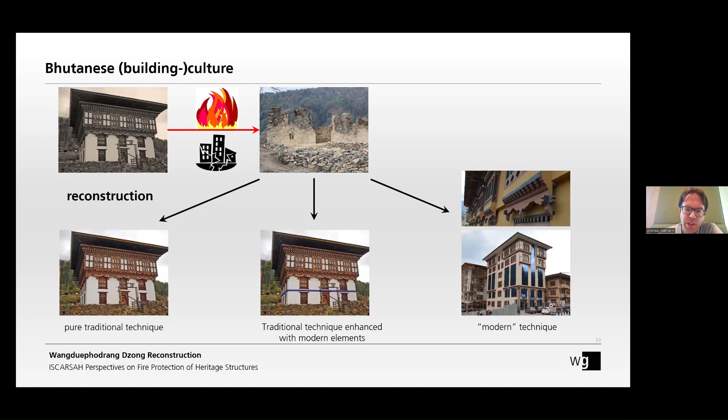Or what we tried, a middle way, is to use the traditional techniques and improve them with modern elements. You cannot avoid that you see them, but you see them in a very reduced manner.

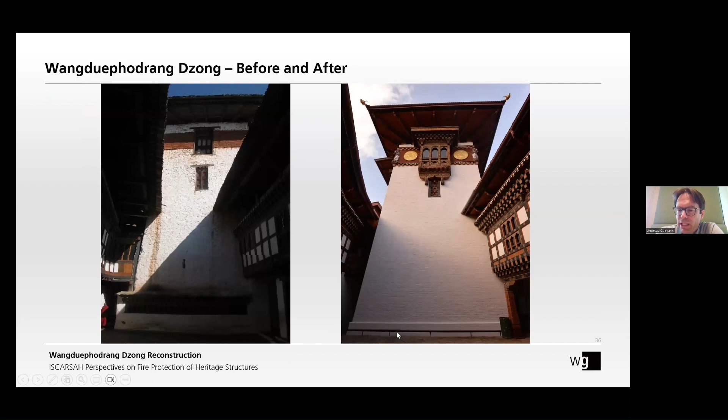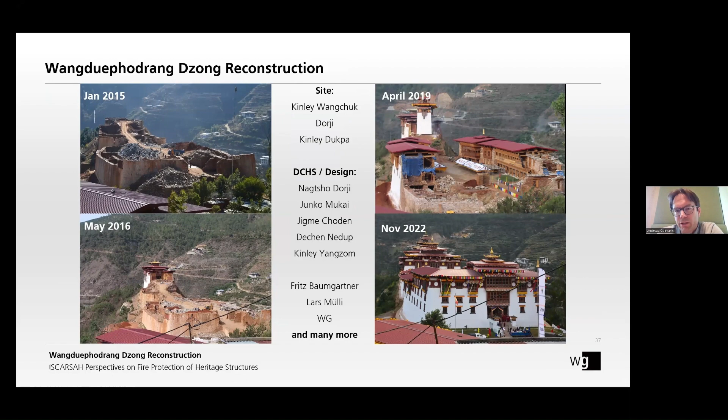With that, I would like to come to a conclusion and say that, of course, I have presented this project, but there are many people who have contributed in a significant way between 2015 and 2022. So that is the initial picture again, before and after. With that, I thank you for your attention.